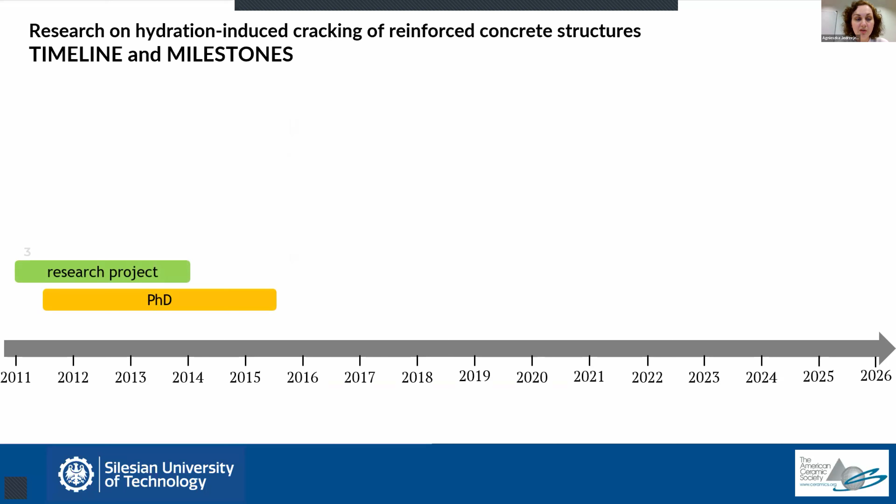My research work began already in 2011 within a research project that I was conducting in Poland together with my future PhD supervisor, Professor Barbara Klemczak. This is how I started my PhD, which was related mostly to numerical modeling of thermal and shrinkage stresses in externally restrained reinforced concrete structures.

At the end of this time, I had the pleasure of visiting École Normale Supérieure de Cachan. This is actually a place where I met with Alessandra, and under the supervision of Professor Farid Benboudjema, I was continuing my work related to numerical modeling of massive concrete structures.

In 2015, I successfully defended my PhD thesis, and the same year I joined a very interesting initiative, the Cost Action TU1404, which was related to service life design of massive concrete structures, or generally structures based on cement-based materials. Within this action, I was responsible for a work group related to modeling of massive concrete structures.

At the same time, I also joined RILEM, and actively participated in the first of many technical committees within RILEM. The first one, 254, was related to thermal cracking of massive concrete structures. Among many outcomes of this technical committee, we produced a state-of-the-art report, which is, I would say, currently one of the most up-to-date books about the problem of thermal cracking of massive concrete structures.

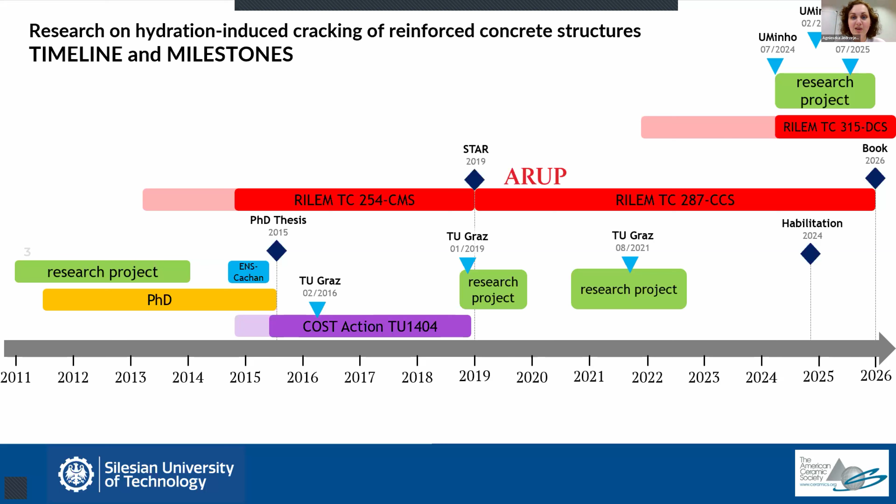I am also currently realizing an interesting research project, which is related to the application of ontologies, so knowledge-driven approaches to concrete design, in cooperation with the University of Minho in Portugal, which is also related to multiple visits. So currently I am actually not in Poland, but in Portugal realizing this project.

Regarding today's lecture, the outline would be as follows. I will start with explaining the problem, the phenomenon of restraint-induced cracking in general, and then I will focus on the cracking which happens in externally restrained elements such as walls, which is my main research focus.

Then I will move to the design methods that are being used around the world, with a special focus on the European approach, but also in comparison to the approach used in the United States. I will make some comments about the disadvantages or limitations of these methods, and then move forward with recommendations for how to better handle the design process to obtain more accurate results. I will finish this lecture with some key takeaway conclusions.

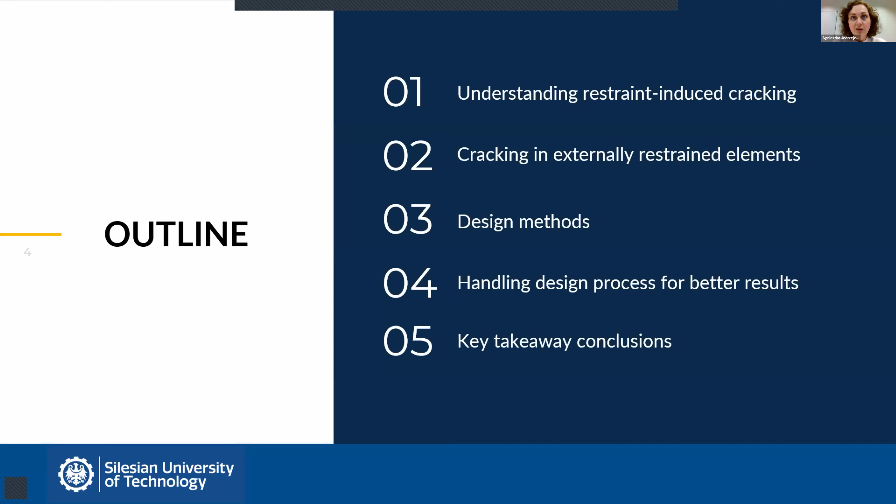So let me begin with what I promised you at the very beginning. Let me start with explaining the problem of restraint-induced cracking. When we talk about cracking, engineers usually think about cracking that happens in hardened concrete during the service life of a structure, when cracks are caused by the service loads predicted during design. Of course we expect this cracking, and even at the design stage we predict that it will happen, so our focus is on limiting the width of the crack.

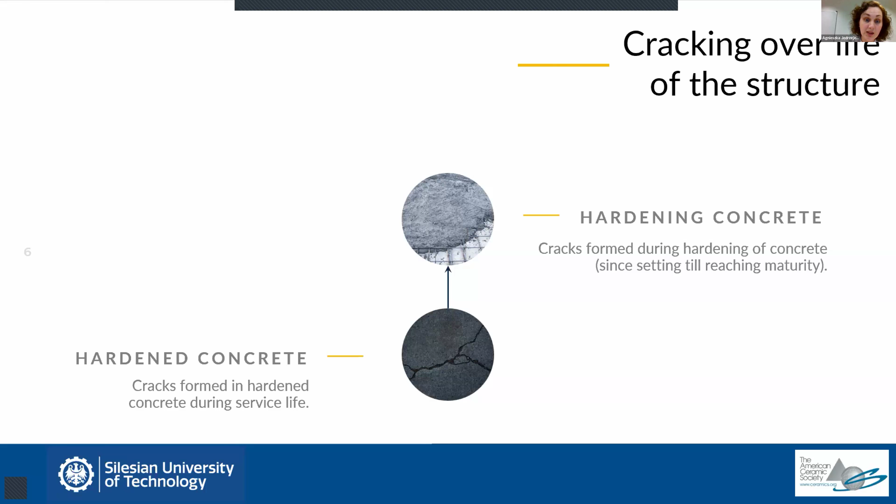However, what most engineers don't realize or neglect is that cracks can appear much earlier during the life of the structure. One of the most important problems related to cracking are cracks which occur during the hardening phase in concrete, between setting and maturity, as well as cracks that can happen already in fresh concrete during setting. While the first type, cracks in fresh concrete, usually don't have much structural meaning, the cracks which happen during hardening are already very dangerous, because if they appear, and they usually do, it means that when the structure is put into operation, it is not in a zero stress state as is usually assumed, but it is already in a way pre-stressed and pre-damaged.

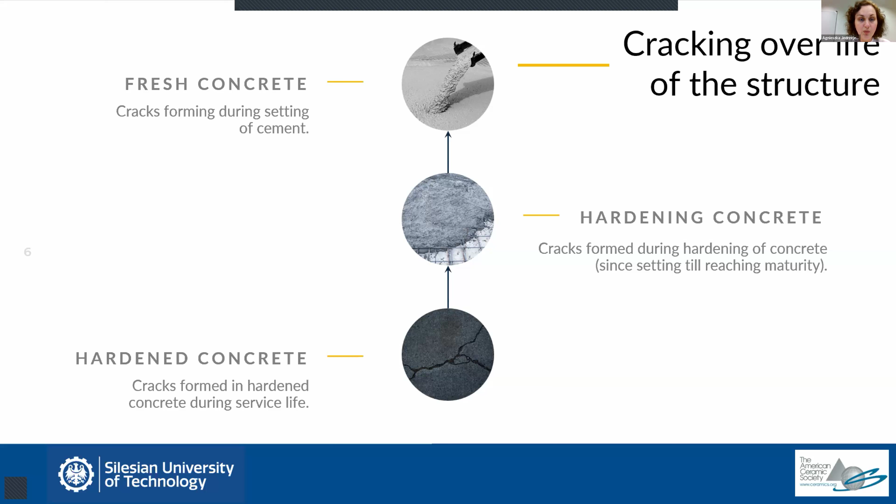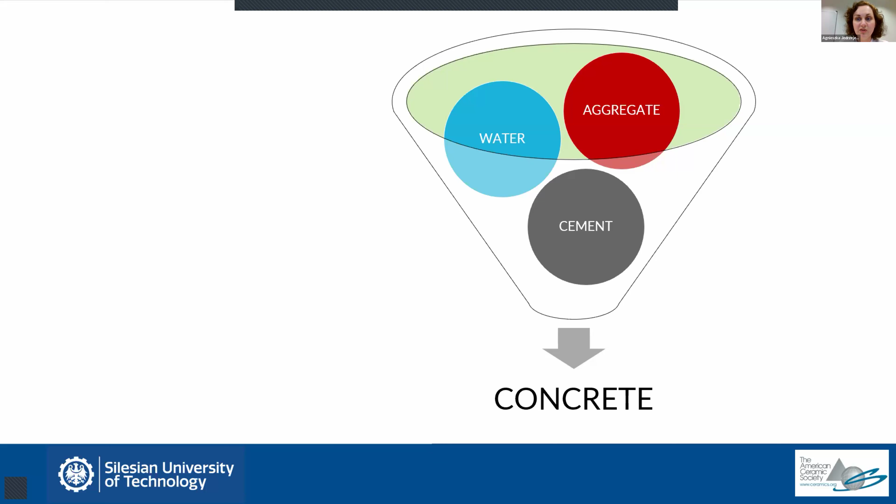And what is the reason for this crack? Where does the problem lie? It lies inherently in the nature of concrete, because as we all know, concrete is a composite material produced from a mixture of water, aggregate, and cement. When we produce concrete, we want to produce an artificial stone in which the components of the aggregate are submerged in a cement matrix, which is produced due to hydration of cement with water. This is how we obtain this artificial stone. Because of this hydration of cement and water and production of this cement matrix, we obtain a desirable stiffness and strength - that is actually our goal. But at the same time, we usually forget that this process has some negative effects.

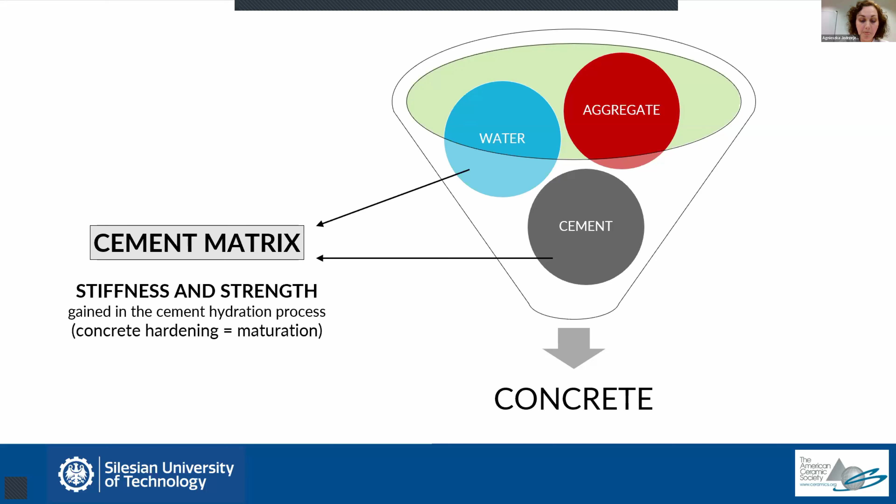Due to hydration, there are some phenomena that happen in concrete related to temperature and shrinkage. First of all, we must remember that cement hydration is a highly exothermic process, meaning that large amounts of heat are produced, leading to an increase of temperature in the element. Moreover, hydration of cement, the bonding of cement with water, causes the so-called autogenous shrinkage, meaning that the volume of the product, the cement matrix, is a little smaller than the total amount of water and cement - another reason why we have a decrease in volume. Finally, some of the water which we add because of workability requirements is not needed for hydration, and this water is removed due to drying shrinkage. So these three processes cause volume changes, and the problem becomes even more complex because the importance of this phenomena depends on the so-called massivity of the element.

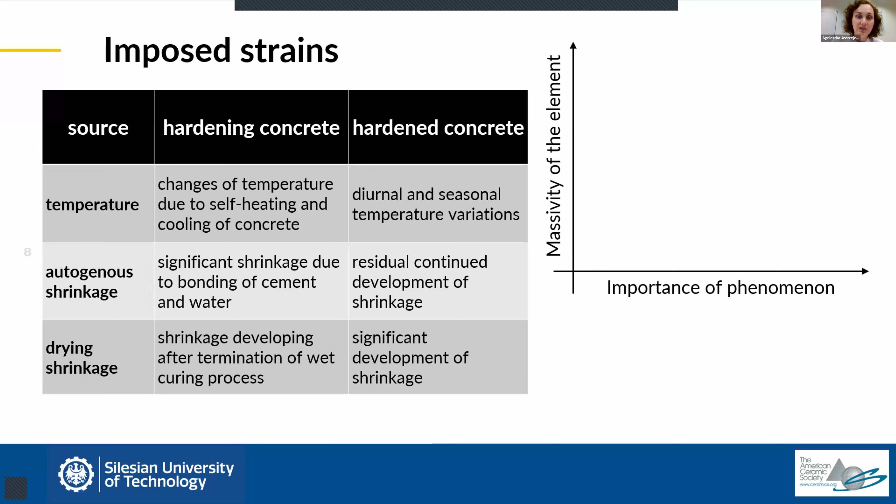I think each of us, if we hear the name massivity, can pretty naturally understand what massivity is. We usually understand it as a large volume of something. We can imagine that as the massivity of the element increases, the influence of thermal strains, connected with the production of heat, also increases. The same goes with autogenous shrinkage, because even though this process is related mostly to the type and amount of cement, it is also a temperature dependent process. So if massivity increases and the amount of heat increases, then the effect of autogenous shrinkage is also augmented in some way. On the other hand, drying shrinkage is a process that is inversely dependent on massivity, because drying shrinkage is mostly a superficial or surface related effect. So if we have a massive element, the drying shrinkage effects will only appear mostly on the surface, but will not influence the volume of the element that much.

We also need to remember that all of these processes not only occur at early ages, but also during the whole service life.

We can also experience some thermal effects during the service life, which are connected with seasonal or daily changes of temperature. But in this situation, since the effect from temperature is from the outside, it decreases with massivity.

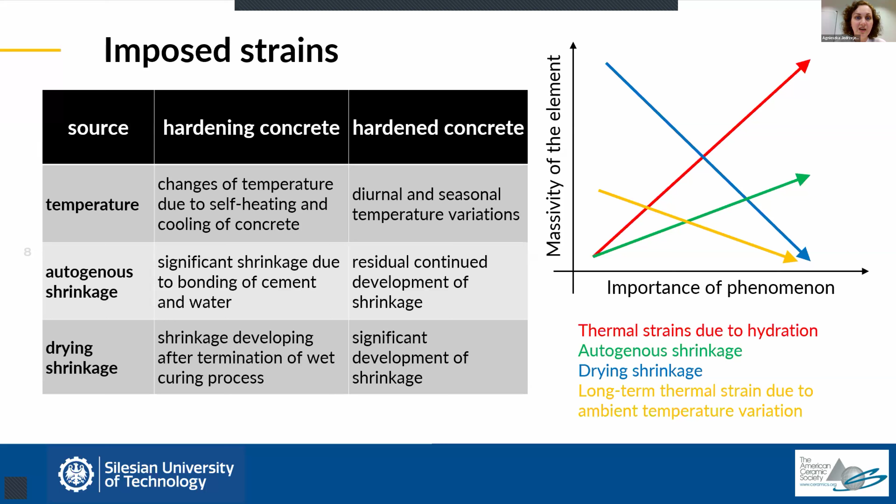And here comes a very nice and widely used definition of massive concrete that comes from the ACI guideline on mass concrete, which says that mass concrete is any volume of concrete whose dimensions are large enough that such a structure will require measures to be taken to cope with the generation of heat from hydration of cement and attendant volume changes, to minimize cracking.

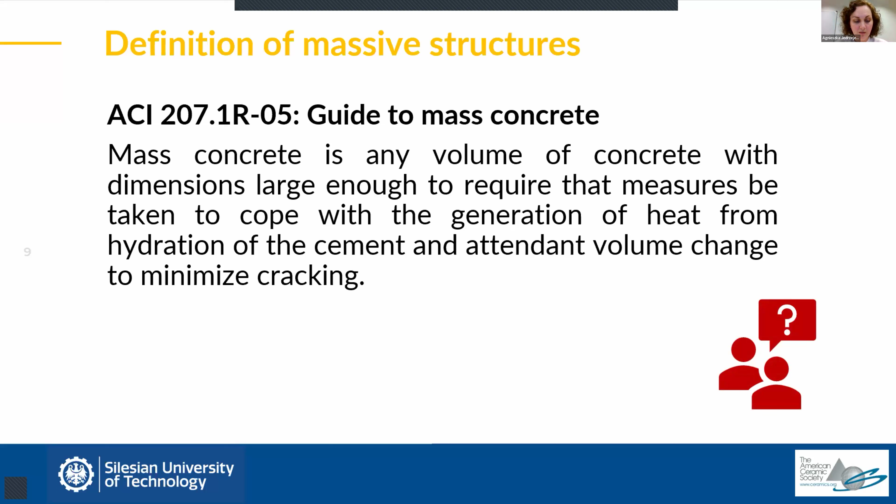On one hand, this definition is very understandable because we usually connect massivity with volume. But on the other hand, I believe, and a lot of people believe, that this measure is not very quantifiable. That's why we relate to other measures, and what comes at hand are geometrical criteria for massive structures.

This same guideline provides some measures for massivity, which relate the volume of concrete to the total area of exposed surfaces. One component, the volume, will tell us how much heat will be produced, and the other component, the area of exposed surfaces, will tell us how quickly this heat can dissipate from the element, which will directly affect the internal temperature.

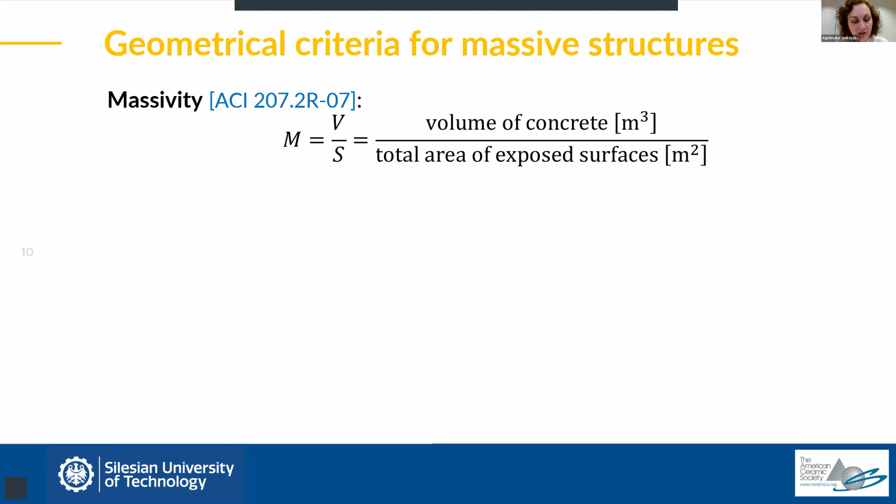This measure has been improved by De Schutter and Taerwe in a European approach, for more complex shapes. Of course, if we imagine a prism, then understanding this ACI definition is very straightforward, but for more complex structures, Schutter proposed another measure which also uses a correction factor representing the shortest path for the heat to pass from the core to the surface.

A similar measure was proposed by Flaga, a Polish researcher, which is very similar to the massivity definition from ACI. The only difference is the inverse approach, even though if we go into detail into understanding these two measures, we will see that the definition of the exposed surfaces in these two approaches is a little bit different.

Also, what is important is that the proposal of Flaga is the only proposal which is actually quantifiable, because not only does it allow us to calculate the massivity, but it also allows us to classify structures according to massivity. So it can allow engineers to do some preliminary analysis to define if a structure is susceptible to thermal cracking or not.

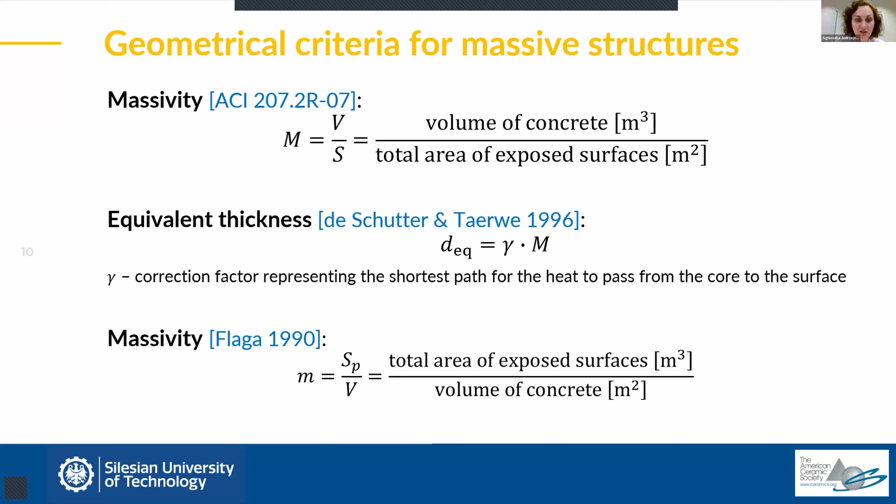That is why a working group within a RILEM Technical Committee, in which I was involved, proposed a corrected massivity, which uses the geometrical massivity but proposes some correction factors to account for other important factors that influence massivity. As you can see in this formula, we have three correction factors related to the following phenomena.

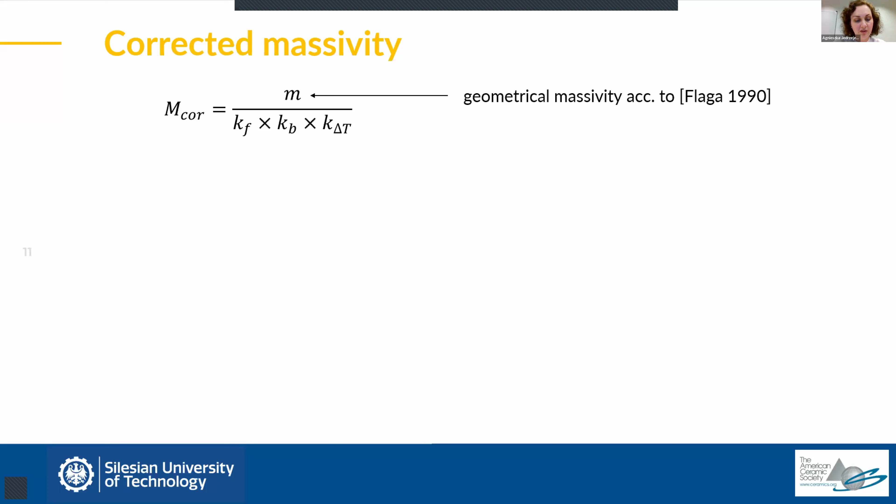First of all, this is a relative heat correction factor, which defines the type of cement that we use. For Portland cement, the value of this correction factor would be 1, but for mixed cement, so cements in which we use less caloric binders, this value would be lower than 1.

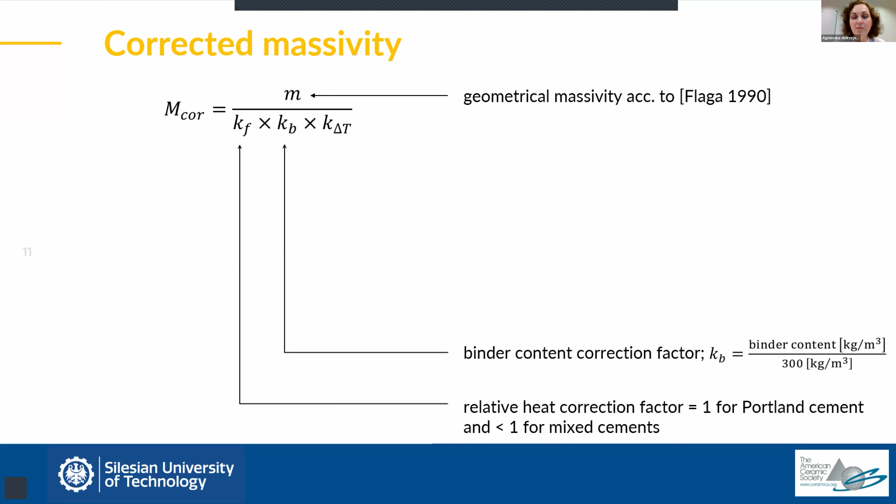Then another correction factor relates to the amount of cement, because using different types of cements, we also change the amount of cement from the typical one that used to be applied in typical concretes several years ago.

And finally, we propose another correction factor which takes into account technological conditions, so the initial temperature of concrete and ambient temperature. This way, the corrected massivity can reflect the technological measures that can be taken to prevent thermal cracking.

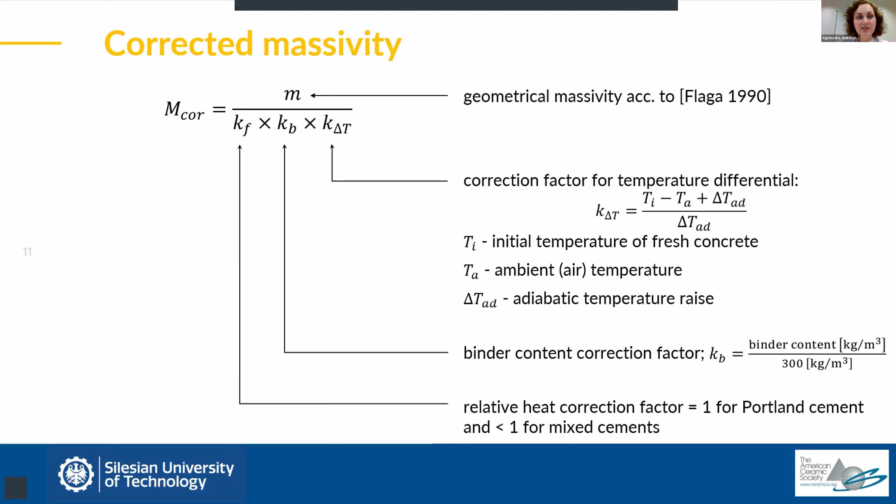So eventually, how do we interpret this corrected massivity? We interpret it in such a way that if the value of this massivity factor is higher, it means that the structure is less prone to thermal cracking.

And we have defined that if this massivity is below 2, then such a structure can be classified as massive, which means it's susceptible to thermal cracking. And if it is above 2 and between 2 and roughly 15, then such a structure is medium thick, which means thermal cracking potential is non-negligible.

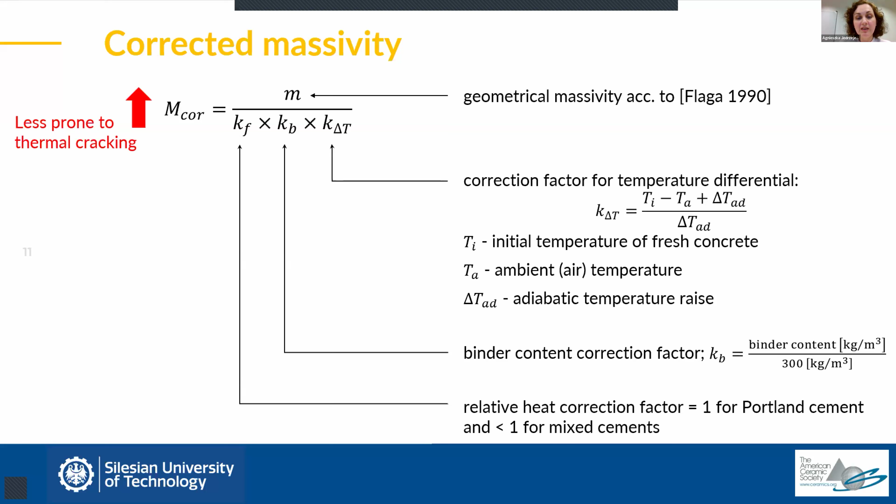Only above the value of 15 do we say that the structure is a thin-walled structure, and thermal cracking can be neglected, meaning we have conditions close to isothermal. If you're interested in more on this research, I refer you to a paper in which our team has presented this measure.

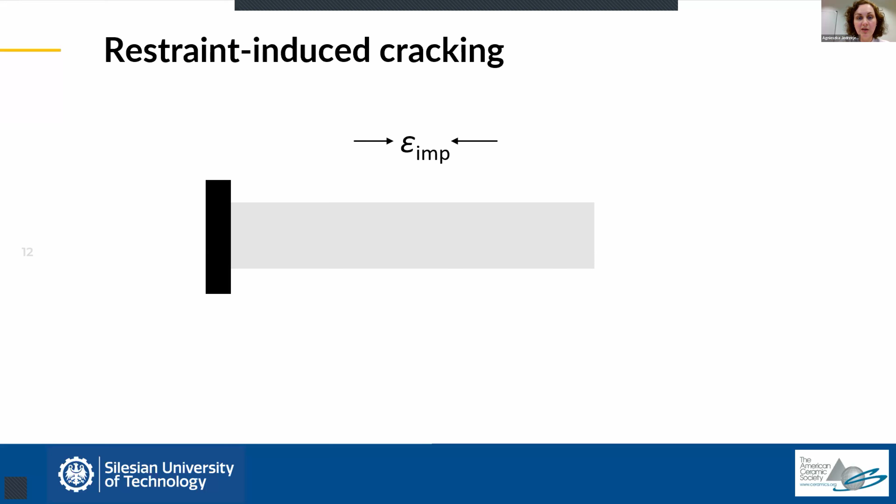So now that we've proposed a measure to say a structure is susceptible to thermal cracking, how do we reflect it in a structure? This is how we move to the problem of restraint-induced cracking. Let me explain with a simple example of a tie element, which is usually used to describe this type of phenomena. If this element was not restrained and was subjected to imposed deformation, such as thermal strain or shrinkage strain of a negative value, then it will just decrease in volume. In such a linear element, we can simplify this into a shortening, and this shortening will cause no stresses.

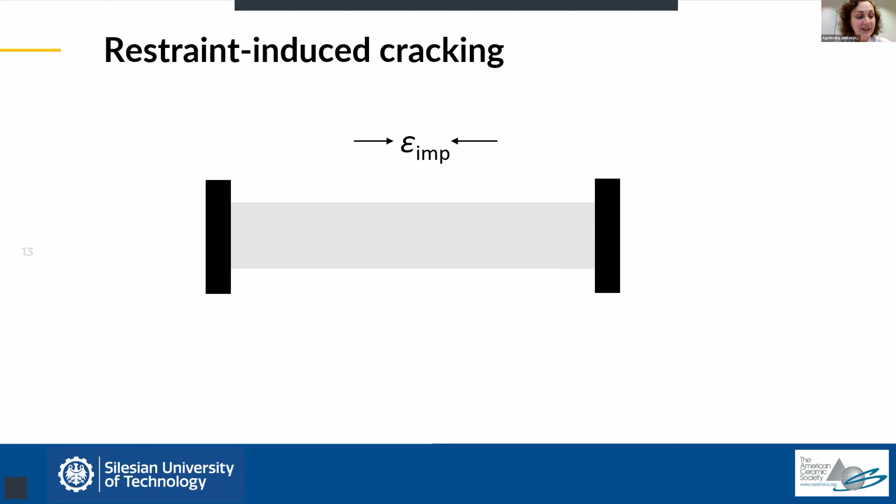The problem arises if such an element is restrained, because if it is restrained and subjected to negative imposed deformation, such as shrinkage, the element tries to shrink but cannot because of the restraint. This means a force will be produced in the element, and since this imposed deformation is negative, we expect this force to be tensile. The value of expected stress within the element can be calculated from this simple formula: force over cross section. If the value of this force reaches the so-called cracking force, meaning the stress reaches the tensile capacity of the element, then we expect a crack to occur.

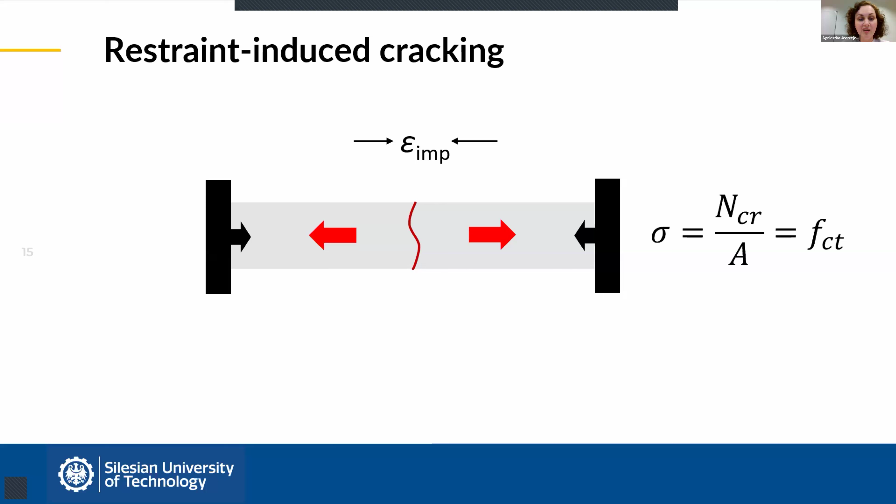In the serviceability limit state of cracking design of structures, we of course allow such a crack to happen, but we have to limit its width. The width of the crack, apart from the value of the strain, will also depend on the applied reinforcement—its location, size, and amount.

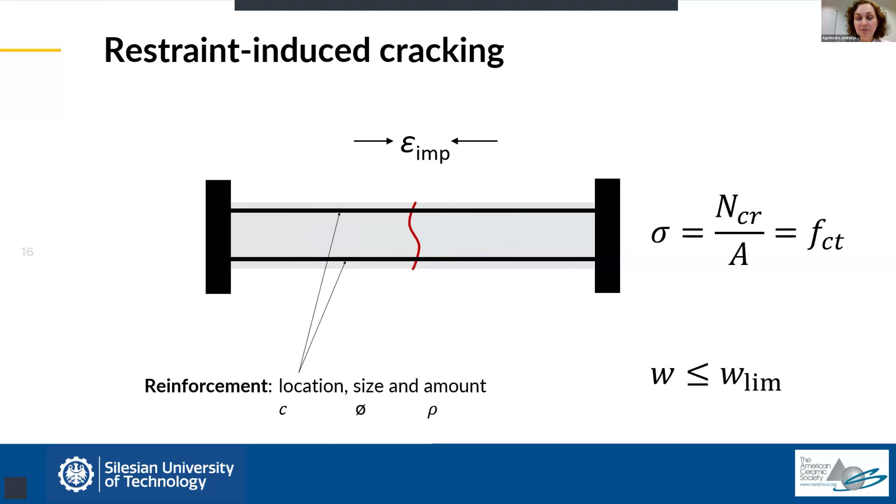Now, how do we correlate this to actual structures? I want to focus on actual externally restrained structures, especially those types of elements important in my research: the walls. We can find in reality many examples of structures with significant massivity, of a value that says thermal cracking is non-negligible, meaning imposed strains will be formed in such elements during service life, but which exhibit some form of external restraint. This encompasses elements such as bridge abutments, tank walls, tunnel walls, or nuclear containment walls.

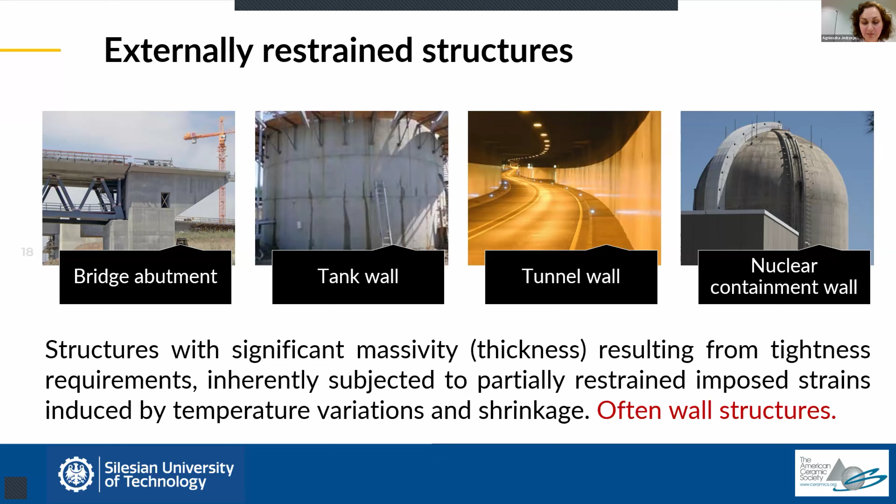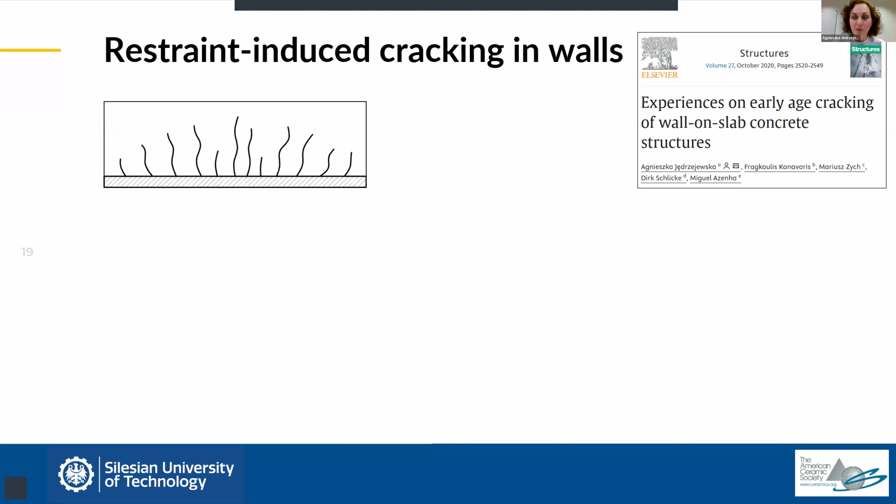For that, I want to show you the results of numerical simulations of a wall. Here we have a scheme of a wall, and we will be analyzing a quarter of it. In the next slide, you'll see the interior of such a wall, and I will show how the temperature and corresponding stresses develop.

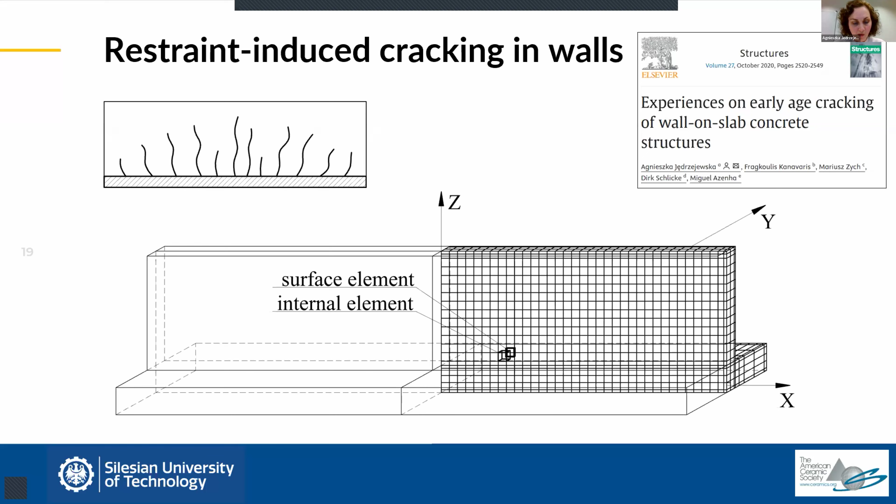In the beginning, we observe compressive stresses in the wall. Then as we pass the maximum hardening temperature, these compressive stresses diminish, cross the zero value, and tensile stresses start to develop. In many such elements, these tensile stresses reach significant values, reaching the tensile strength of the element. As I explained at the beginning of this lecture, if the tensile strength is reached, it means a crack is formed.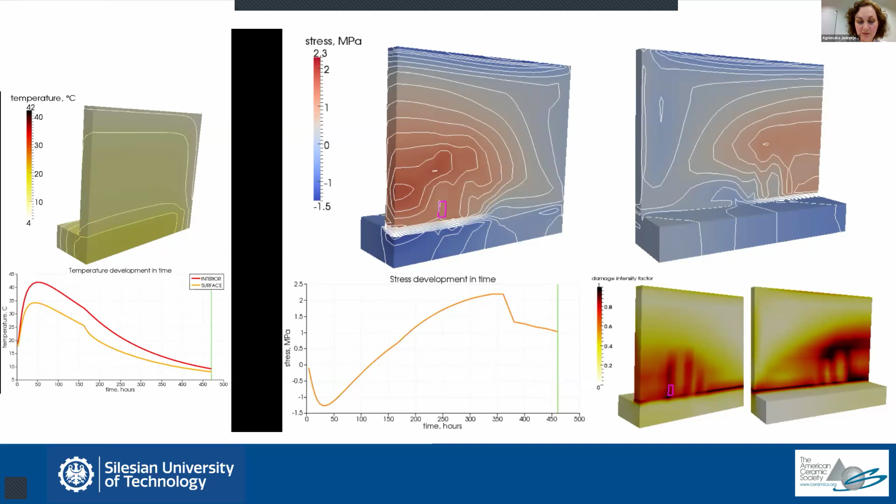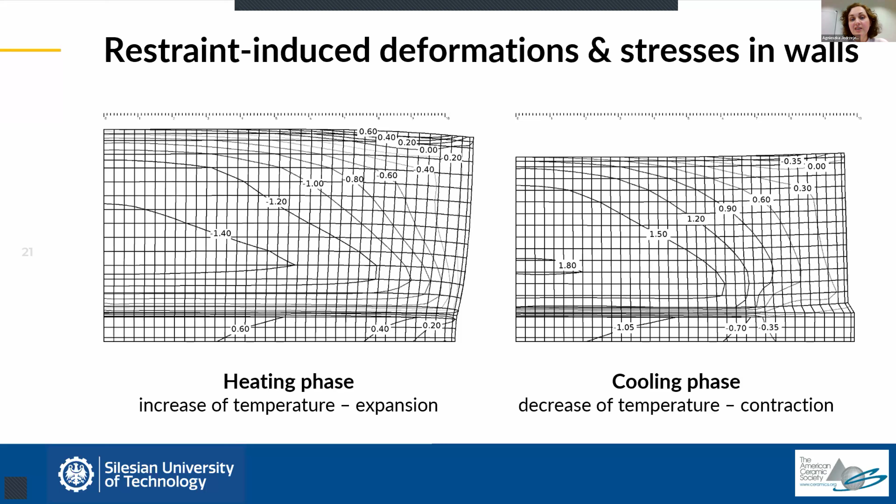Just to summarize, the situation looks like that. We can divide the behavior of such a wall into two phases. We have a heating phase, increase of temperature, which results in an increase in volume, especially increase in length, which means the wall tries to elongate. And in the cooling phase, when the temperature decreases, the wall starts to shorten, or it would like to shorten. But since it is restrained, this deformation is partially limited. That is why the stresses occur in the wall.

So obviously, as I have shown, the maps of these stresses are pretty complex. These stresses are variable within the volume of the wall. But what we can observe is that some simplifications can be made in a sense that when we look at the map of stresses along the length of the wall, they coincide with principal tensile stresses which are observed in the wall.

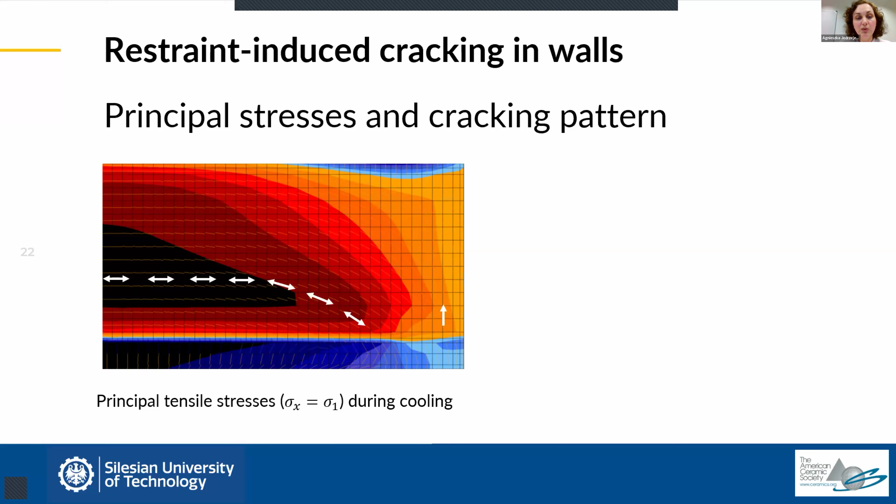So if we follow the trajectories of tensile stresses in the wall, we see that in the central part of the wall, the tensile stresses are practically horizontal, and the deviation starts to appear as we get closer to the end of the wall, which results from the warping effect of this end of the wall.

And as a result, the cracks look like that. So they are vertical in the central part of the wall. Again, we are looking at a quarter of the wall, actually like a half length of the wall. So what we see here is that the crack in the center of the wall is vertical and reaches relatively the biggest height. And then the cracks become smaller and they turn to tilt towards the end of the wall.

So how we also understand the principal tensile stresses is that the cracks will form in the direction perpendicular to these tensile stresses, and they will open in the direction which complies with the trajectory of the tensile stresses. So by this simple stress analysis, we have explained why we observe such shapes of cracks.

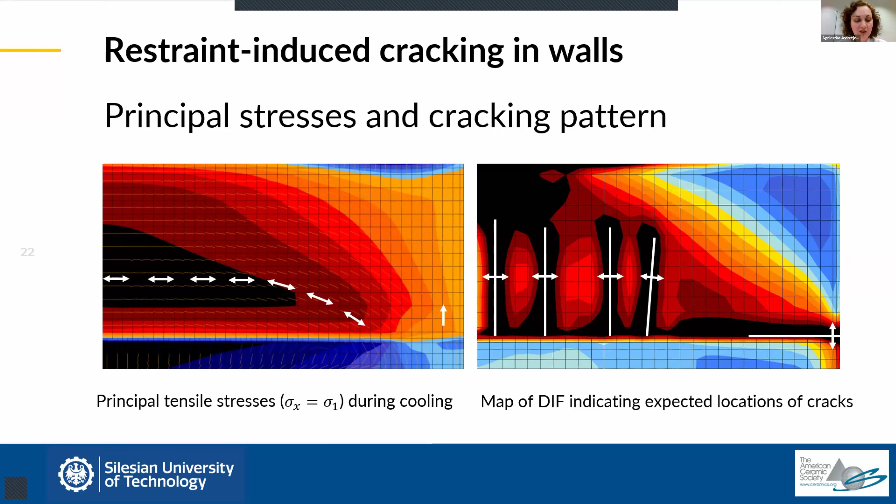And now how we apply it in the modeling. So we are coming back to this simple tie model. Again, here you see a wall with a typical cracking image. And as we have explained, the height of the cracks will depend on the effect of base restraint. And this is usually depicted with the use of the so-called degree of restraint.

And I think it also can be explained rather naturally. So the biggest restraint, so the force, let's say, with which this wall is held, it is biggest at the joint, and then it decreases towards the free top of the wall.

But anyway, as I have shown in the slide before, we may say that in the central part of this wall, the tensile stresses, so when we have this imposed deformation that is negative, which means it's trying to shrink the wall, as a result, there is a tensile force that develops. So even though this tensile force is eccentric, we can say that in the central part, it produces pure tension. And since the design for cracking is focused on the maximum crack width, and the maximum crack width will appear in the center, we can simplify such a wall into a tie.

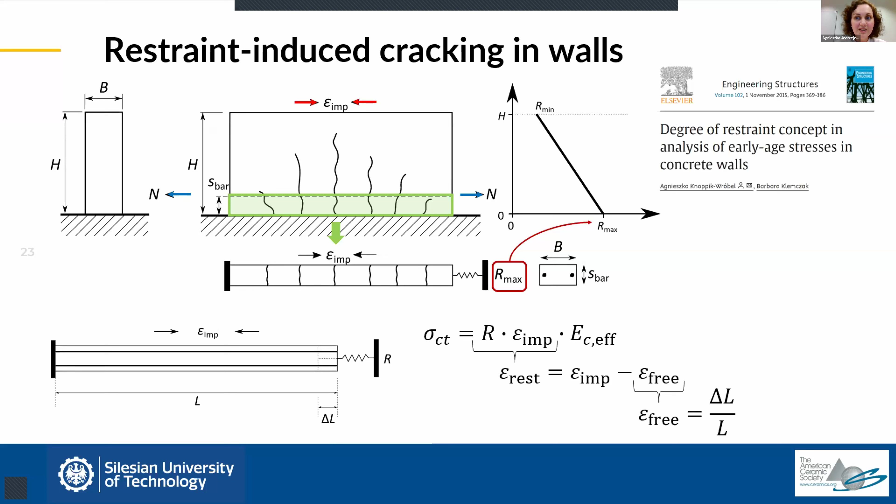And why is that possible? Because for that purpose, we use the so-called simplified viscoelastic material model. And what are the basic assumptions of this model? So once again, let's come back to this diagram, which presents development of temperature in the element.

Just to remind you, we have a phase of rapid temperature increase when the hydration heat prevails, and then subsequent cooling when we deplete the hydration heat and the wall starts to cool to the ambient temperature. This cooling phase is responsible for production of tensile stresses, as I showed in this more complex analysis.

So in our simplified approach, we only consider the thermal strain caused by this temperature decrease. If we add to this the effect of shrinkage, like drying shrinkage and autogenous shrinkage, this is how we obtain the total imposed deformation. Only the restrained part of this deformation is responsible for producing stress. So for the calculation of stress, we only take R times epsilon, which means the degree of restraint times total imposed deformation.

And we use a linearization technique, so we can say that stress depends directly on strain, and the proportionality constant, according to Hooke's law, is the modulus of elasticity. But we don't use the full modulus of elasticity, we use the so-called effective modulus of elasticity, which represents the effect of creep. This modulus is much smaller than the actual modulus of elasticity. As a result, the actual stress will be smaller than in a typical linear analysis, but this is how it is - the effect of creep reduces the stress.

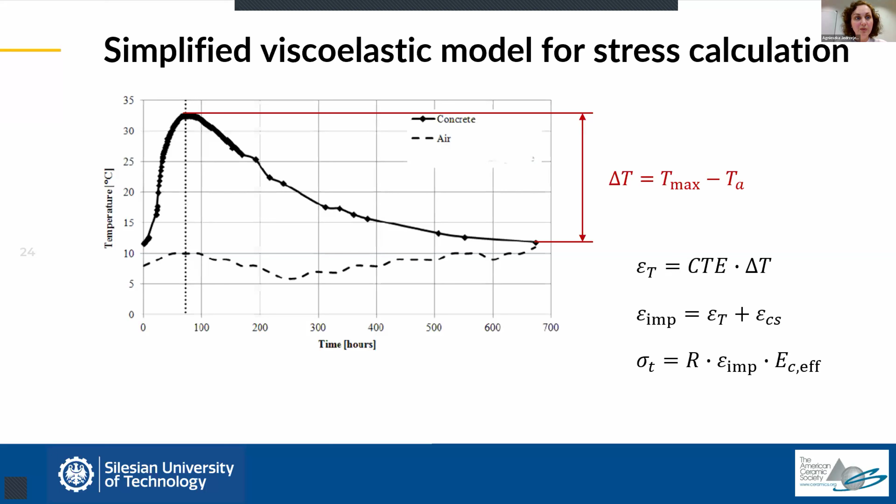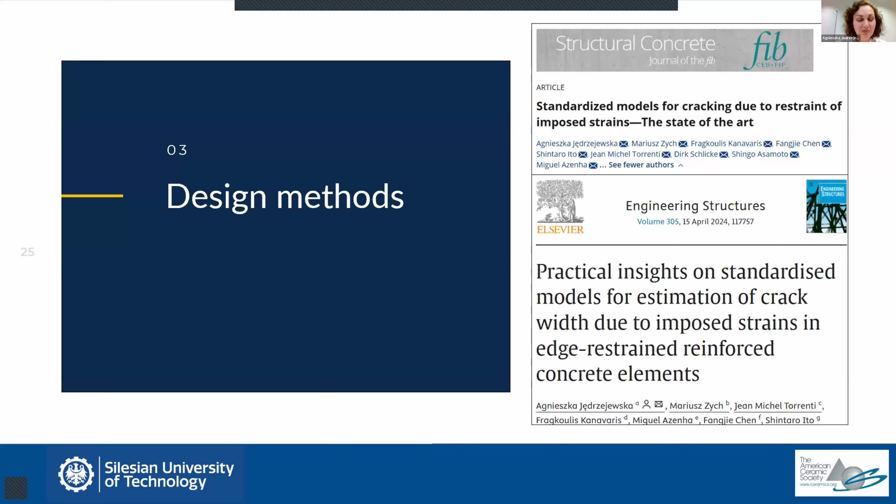Now let me show you briefly how design methods approach this. What I will show in the next slides, you can read more about in the papers that our technical committee produced in cooperation with engineers from ARUP. I would like to present the methods that are used worldwide. I will try to be brief and not go too deep. But anyway, I will start with the European approach - the approach proposed in Eurocodes, the family of standards commonly used in Europe, but also outside of Europe on other continents.

According to Eurocode 2, the Eurocode dedicated to concrete structures, the width of the crack in general, not only the crack caused by imposed deformations, but the crack in general, can be calculated as a product of crack spacing and the difference in mean strains between steel and concrete. Nonetheless, in case of restrained cracking, as I showed you, we don't have full restraint of the element, which means the width of the crack will depend not only on the applied reinforcement, but it will depend on the magnitude of restrained deformation.

That is why the standard proposes to calculate the mean strain difference as being dependent on this restrained part of strain. This way we take into account the local effect of crack on the element.

However, this value is reduced by the so-called extensibility of concrete, which means the ability of concrete to extend between cracks. So bluntly speaking, we say that cracks happen, but then concrete can regain some of its volume between cracks as a form of relief of stresses. This is an important factor to account for.

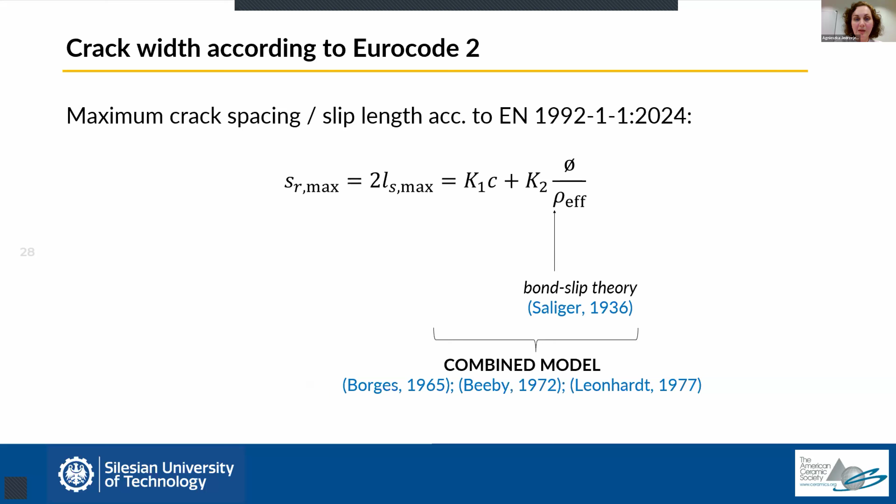However, as far as the crack spacing is concerned, Eurocode proposes to use the same approach as it does for direct loading. For that purpose, we use the so-called combined model, which is composed of two components: one which results from bond slip theory, and which relates the slip length to the amount and location of reinforcement, and the other one which directly relates it to concrete cover.

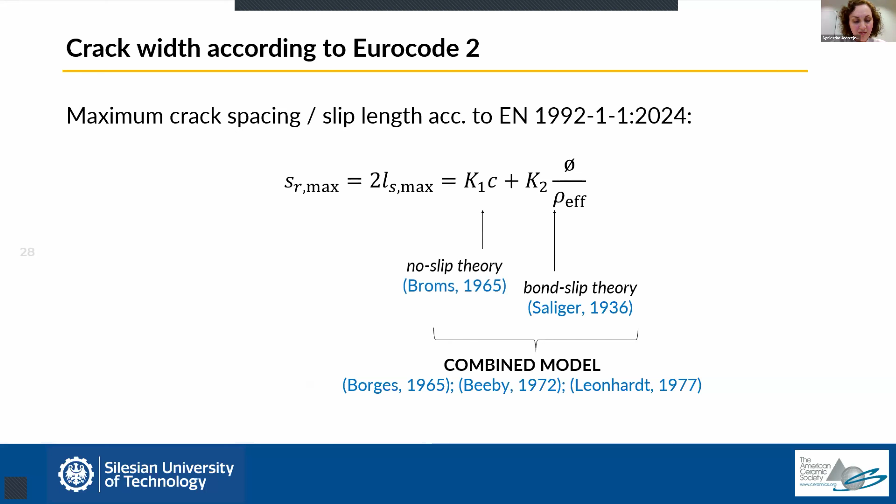In Europe, you can find a lot of variations of this approach, but all of them follow the same formula. There are two main differences. First is whether the concrete cover is taken explicitly into account, because in most approaches, the concrete cover is taken into account in determination of the effective degree of reinforcement. And the difference lies in the values of constants in this approach. So this is basically how we do it in Europe.

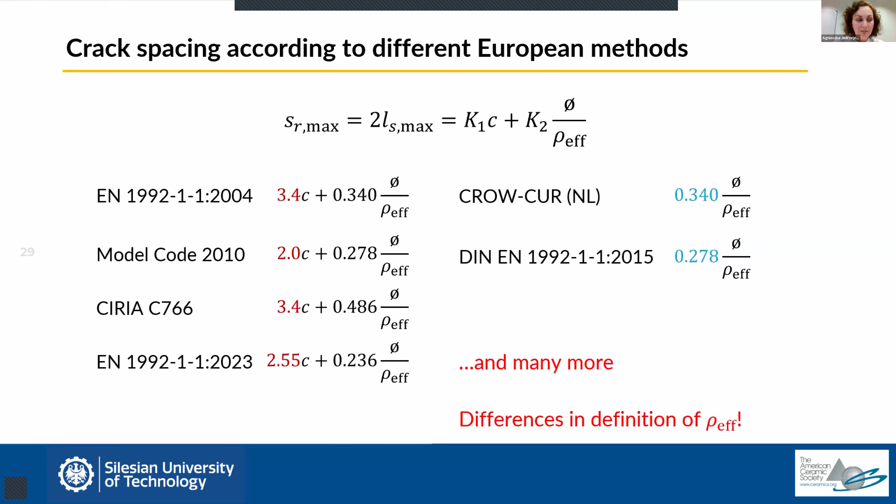However, there are other approaches used worldwide, which can be classified into groups depending on the location. The second group I called Asian Pacific methodology, because these concepts are developed mostly in Australia and in Japan, and they are applied in various countries of the Asian Pacific region. The first approach was proposed by the Japanese organization, Japan Concrete Institute, and this approach is based on FEM-based calculations and statistical analysis. In this approach, it is first required to determine the so-called cracking index.

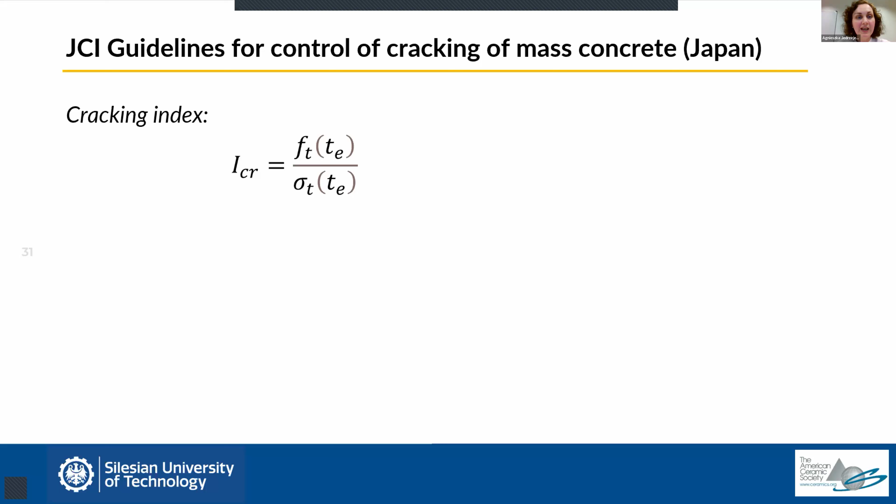This relates tensile strength and tensile stress, but the standard explicitly recommends that this is determined using complex three-dimensional FEM-based simulations. However, the crack width is then calculated using a fully empirical formula, which uses the cracking index, determined this way. This formula has been developed based on a database of results, which were calculated using FEM-based simulations.

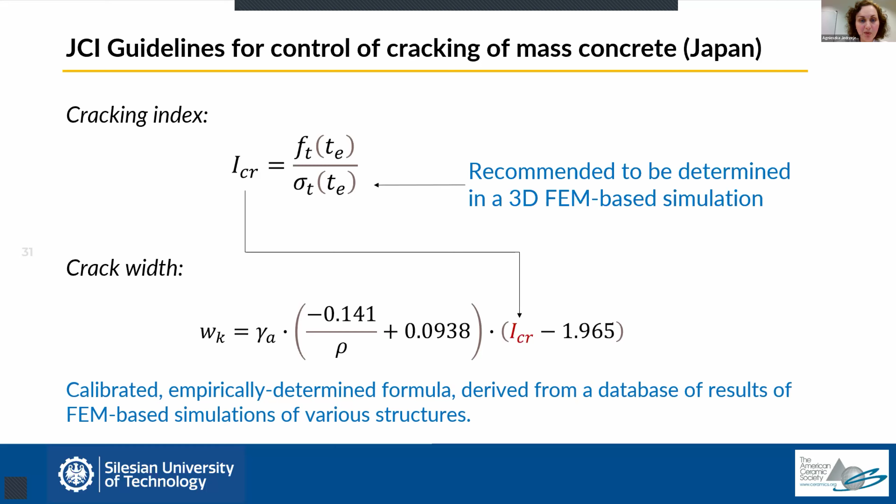An alternative approach is used both in Japan and in Australia, and they are based on a similar approach, even though they were developed somehow independently.

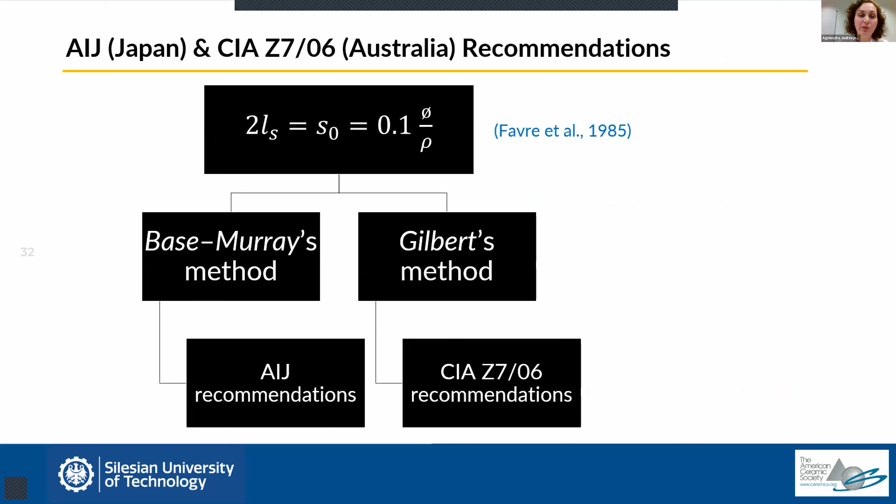What is important here, without going into too much detail, is that in contrast to, for example, the European approach, this approach doesn't assume that we have a stabilized cracking pattern.

Instead, when we know the value of the expected imposed deformation, we calculate the expected spacing of the cracks and compare it with the expected stabilized cracking. This way we know which state we are in, and we calculate the expected crack width accordingly, because it is important to remember that the slip length changes with the value of slip.

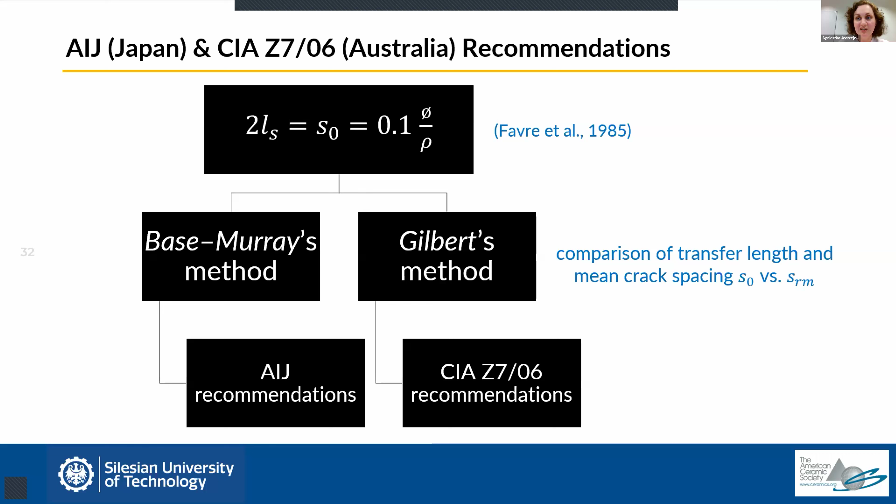This means the magnitude of the load, and these methods take this into consideration. Nevertheless, we can see similarities between these equations and the European approach. The stresses and the resultant crack width also depend on this restrained part of strain.

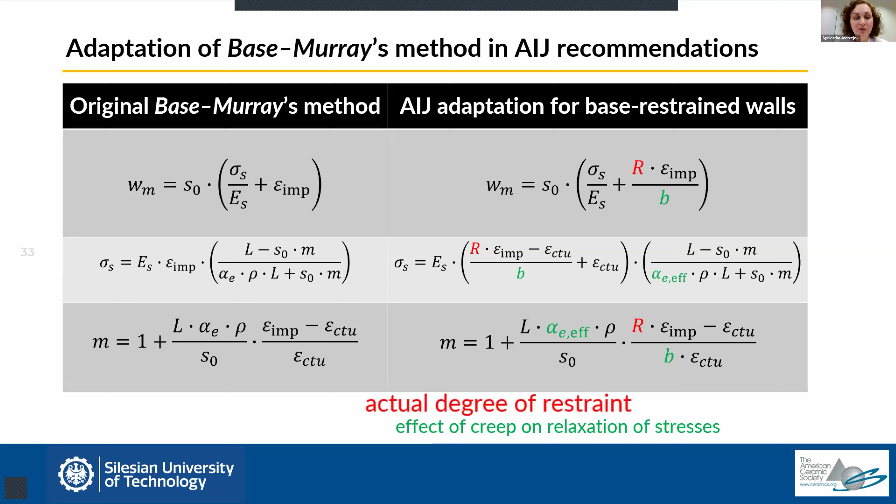On the left, you see the original method, which was developed for a fully fixed tie. On the right, you can see an adaptation prepared for a partially restrained element such as walls. The difference lies in the fact that we take into account the actual degree of restraint, and also that we account for the effect of creep, which is of great importance at the hardening stage when the value of creep is really high.

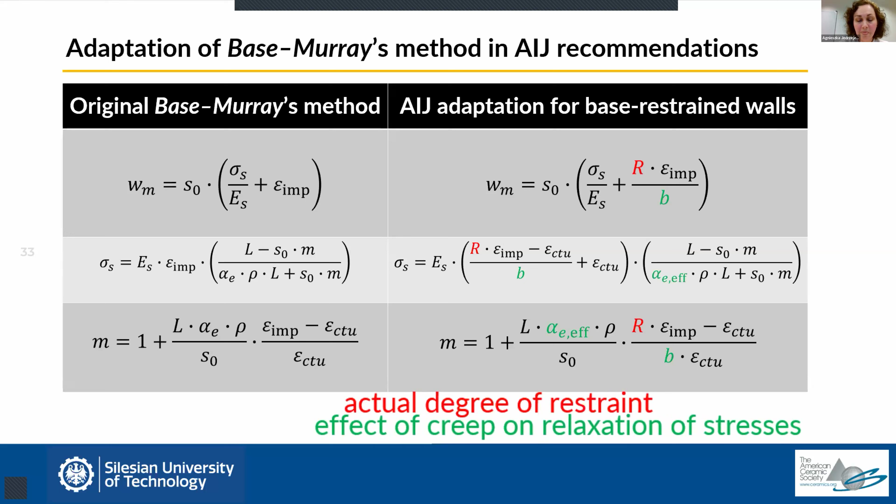Finally, we have an American approach, which was implemented in the previous version of the ACI report 207. Unfortunately, I saw that in the current version it was removed. Nonetheless, I really wanted to investigate this approach.

Here the philosophy is a little bit similar to the European one. To calculate the crack width, the same formula is used as for direct tension or direct bending. The difference lies only in some parameters, some constants, in the sense that for tension we expect greater widths of cracks, so higher values of parameters are taken into account.

The difference between the European and American approaches is that in the European approach, first we calculate the crack spacing and then the resulting crack width. In the American approach, it's the other way around: first we calculate the crack width, and from that we calculate the crack spacing.

If you look at this lecture again, you can make a direct comparison between this approach and the European approach, and you'll see that the formula is exactly the same. So the correlation between crack width and crack spacing is exactly the same as in the Eurocode approach. The only difference is in the factor which converts mean crack width to maximum crack width, because in the American approach this is 1.5 and in the European approach it's 1.7.

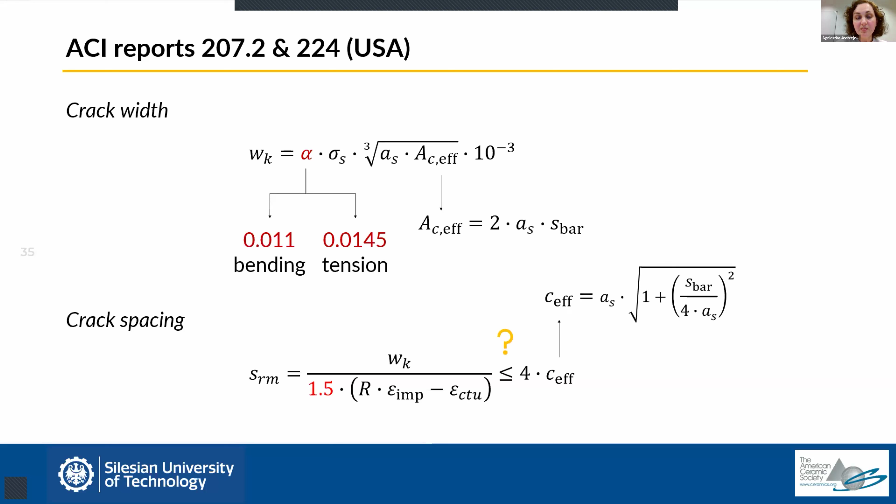Another difference is that the American approach allows us to check which cracking stage we are in with our loads, because we compare the crack spacing calculated this way with the crack spacing expected at the stabilized crack stage.

Another very interesting aspect of the approach proposed in the ACI report is how the required amount of reinforcement is calculated, which really allows for high optimization levels.

I told you at the beginning of this lecture that the degree of restraint changes along the height of the wall. Normally in all of the previous approaches, we took the maximum value of the degree of restraint for calculations, calculated the expected crack width, and used this to calculate the required reinforcement. But if we do it this way and apply uniform reinforcement, it means that the higher we get in the wall, the more over-calculation we achieve.

In the American approach, it's explicitly stated that the wall should be divided into parts called lifts, and we can differentiate the amount of reinforcement needed at each height. We are producing not just one model, but multiple models of partially restrained ties, and in each of these ties we calculate the crack spacing, which depends on the degree of restraint present at that level of the wall.

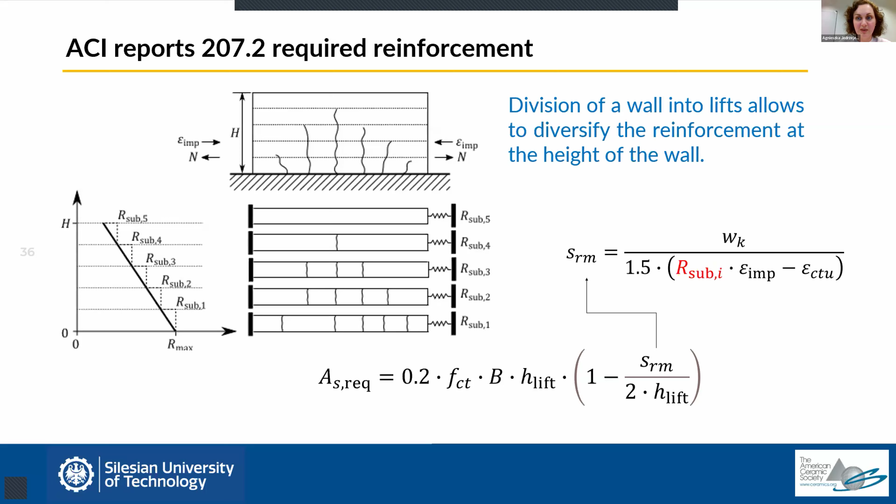So this can really give us a lot of savings when calculating reinforcement. In my research, I investigated all of these methods and compared them. I was interested in seeing how they work, and I checked many different structures, trying to evaluate the predictive capacity of these methods, and I observed a lot of discrepancies.

In this slide, I decided to show you just one theoretical example of a typical wall, which I wouldn't even call a massive wall.

And you can see that the differences of calculations using different methods are really huge. So on the left, you can see the expected crack width, which is calculated using different methods. And on the right, you see the required amount of reinforcement that is needed to limit the crack width. So as I said, the differences are really huge.

And with my team within RILEM, we have calculated many walls. And what we have observed is that even though these differences are really huge for typical walls, if we go for untypical walls, so the walls whose characteristics are deviating more and more from typical assumptions that we meet in the standards, these differences become even bigger.

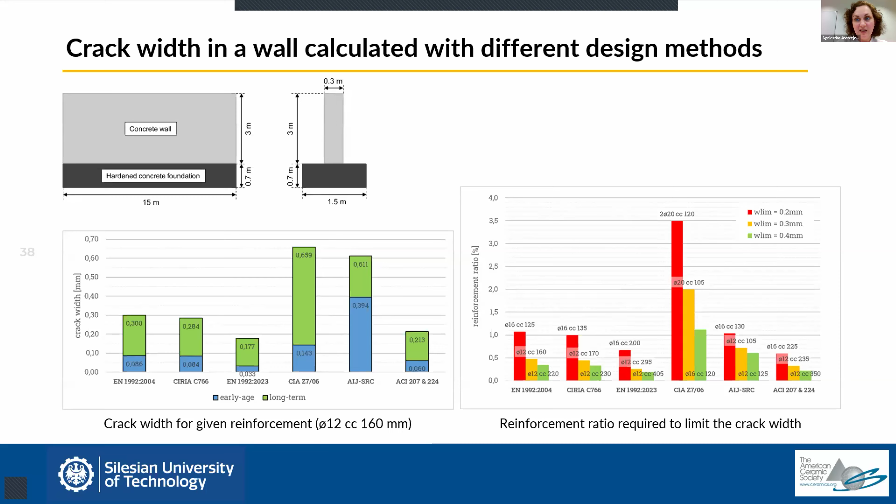And in this last part of this lecture, I want to make some discussion, give some proposals of what we need to take into account to obtain results which are closer to reality. So how we should adapt, how we should wisely use these methods to obtain reasonable results.

So first of all, I hope I was able to show you that since these structures are a little bit non-typical, it is important to remember that the width of the crack will depend on the actual level of the load. Because in such structures, we are never reaching the stabilized crack spacing, because only in the stabilized crack spacing will the amount or the width of the crack depend on the reinforcement. No, in this situation, the width of the crack will actually depend on the level of the load.

So in order to predict the crack width properly, we need to be able to predict the value of this load, which means first of all, the magnitude of the imposed strain. And as I said at the beginning of the lecture, this imposed strain is composed of three components: one which is related to temperature, and the other two which are related to concrete shrinkage, the autogenous shrinkage and drying shrinkage.

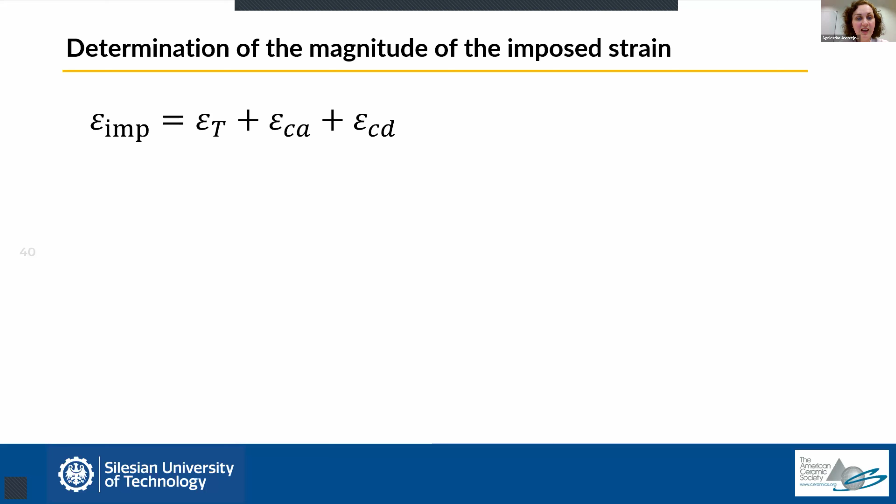So for these latter two, we have multiple methods that allow us to predict it decently, I would say. Among them, I can enumerate different versions of Eurocode, but determination of thermal strain is much more complicated. So there are some proposals of how to calculate the thermal strain, so the temperature changes in a hardening structure. And we have some European approaches, but also the ACI committee developed a really nice, really interesting method. However,

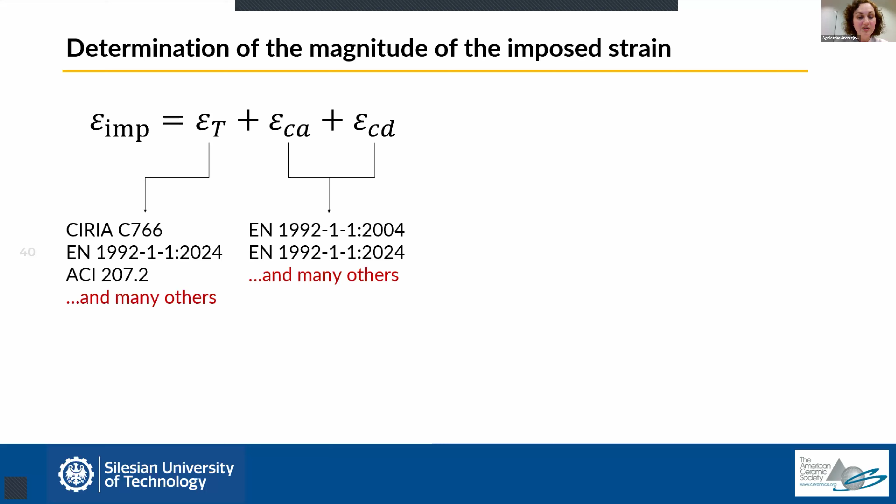I'm pretty confident to say that, especially regarding thermal strains, these methods are not really precise, and I support the approach of the Japanese from JCI, who say that currently, also given the abilities of FEM-based methods, it is better to determine thermal and moisture fields using three-dimensional models and FEM-based methods to calculate it.

And I don't want to go deep into that because my time here is finishing, but if someone is interested, of course, we can have a chat on this, or I refer you to two papers that I have co-authored, which delve into proper modeling of thermal and moisture fields and resulting stresses in mass concrete structures.

The second aspect, which is really important in determination of the load, is of course the degree of restraint, because it's not only important to assess the magnitude of imposed deformation, but also which part of this deformation will actually produce stress. And for that, we need to be able to determine the degree of restraint.

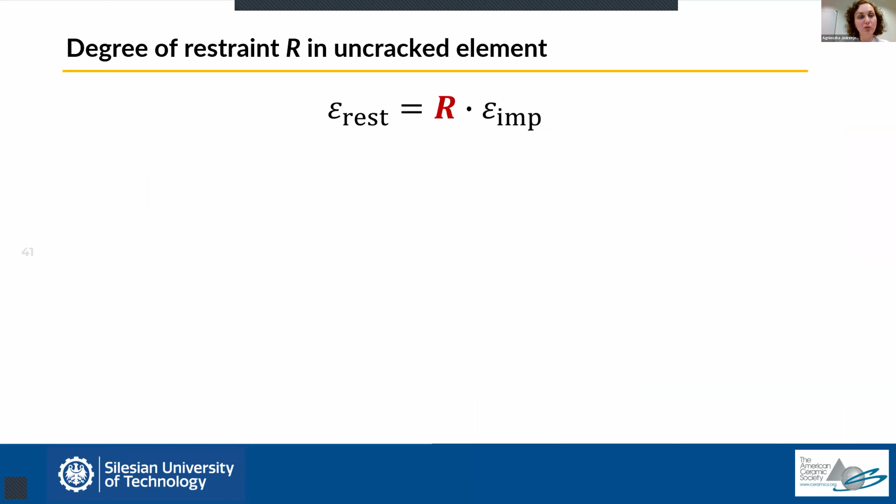And similarly, we have two roads. The first path is with analytical methods, and there are many methods that allow us to assess the value of the degree of restraint, which come from many parts of the world. Some of them are standardized, some are non-standardized.

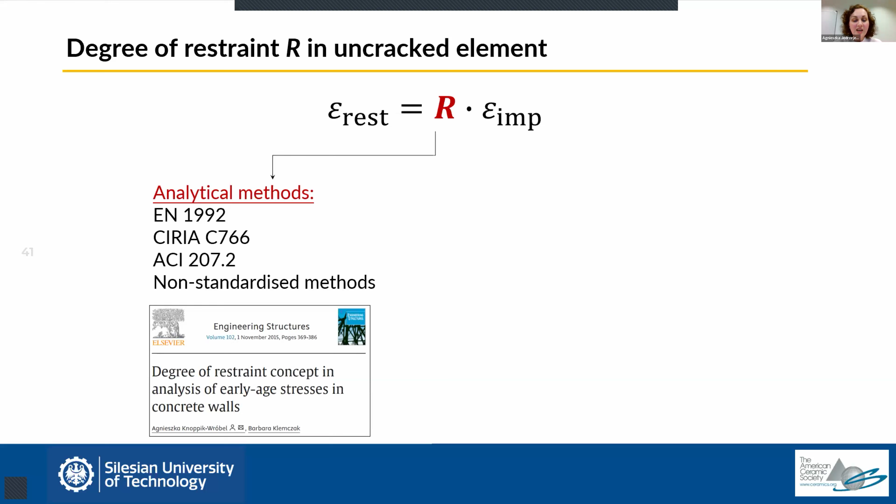But again, to be really precise, especially in complex structures, I support 3D modeling of the structures to get the actual value of the degree of restraint. And also I co-authored some research which goes deeper into this topic.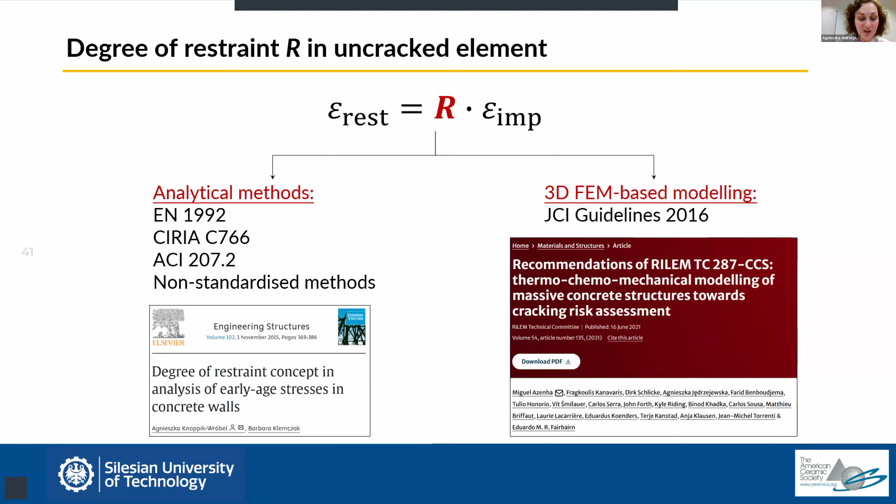And finally, when we talk about the degree of restraint, we need to remember one thing: that all of these methods that I presented here are related to the uncracked element. While actually, when we want to find what is the width of the crack, we are already in the cracked state. And there are some misconceptions regarding the degree of restraint in a cracked element.

So I will not be discussing this equation in detail, but I just wanted to show it to you as a derivation of the model. So again, we come back to this basic model of a tie, which is partially restrained. And if we make subsequent derivations, we get to the formula of a degree of restraint in an element, which is shown at the bottom of this slide.

And we can easily see here that when we look at the stiffness of the element, we see that when the stiffness decreases, and this is what happens in cracking, then the restraint will actually increase.

One common misconception is that due to cracking, the element becomes less stiff, which means it will have smaller stress. On one hand this is true, but there's also a counterbalancing effect of increasing restraint. So we may not be fully confident that the resulting stresses in the cracking element will be lower. They might be the same or even higher.

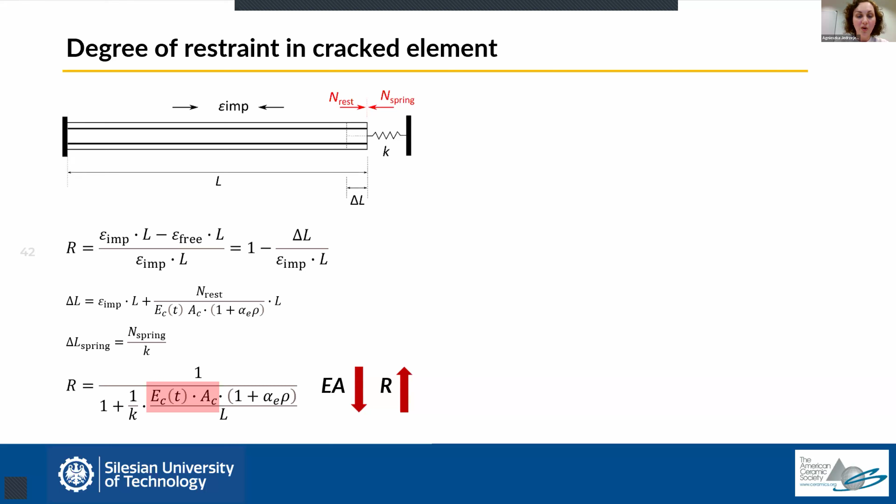Once the crack is formed in the wall, the stresses in the element decrease. This is what we'd expect, which is nice for the wall, but we should remember the stresses will consequently decrease in the foundation, meaning less compression. If there's less compression in the foundation, it will extend and pull the wall, consequently opening the crack.

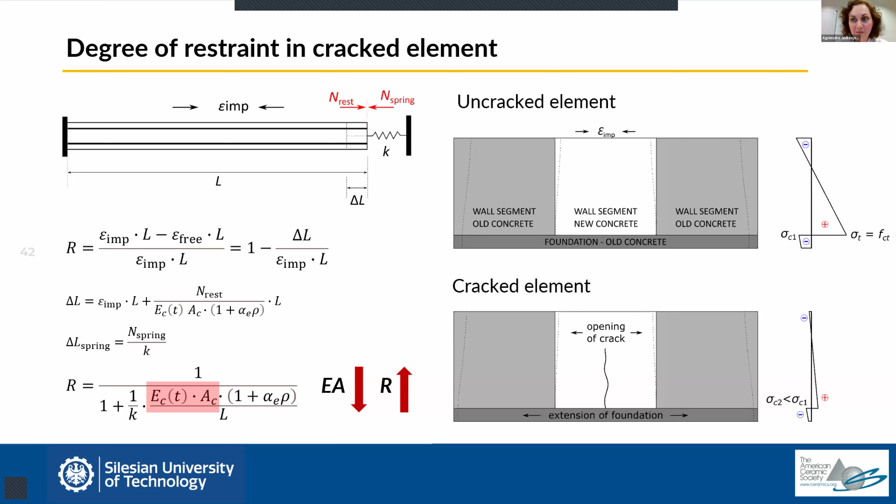So lower stresses in the wall may not necessarily mean the crack will be lower. The final important aspect is that the elements we're discussing are thick elements, of higher massivity. So using the tie model directly might cause a lot of misconceptions. I want to present slides following research started by the University of Graz, including findings by Professor Schlicke and my company.

When we consider a typical tie, or restraint element, we expect such behavior: as the tie is tensioned with increasing force, it causes occurrence of subsequent cracks. Since this element is thin, these cracks will be through-cracks, appearing one after another at the same level of force.

The situation becomes complex when the element is thick and the reinforcement is located close to the surface, not really affecting the core. In such an element, much higher force is needed to produce a crack because the area is higher. But the behavior during cracking is different, because since such large force is required to cause subsequent cracks, it's very hard to produce another through-crack.

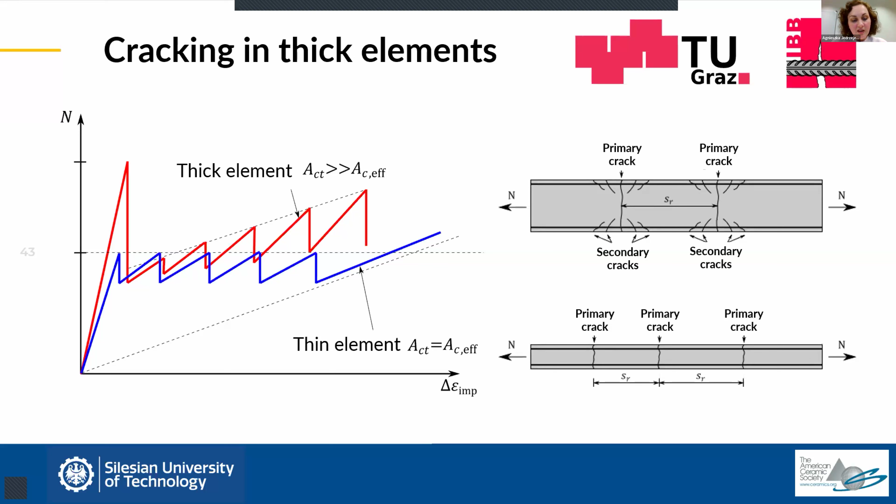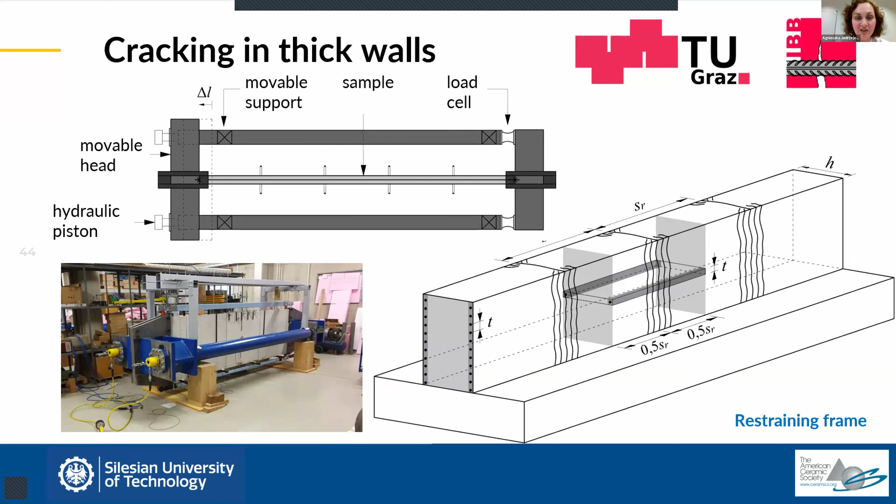We investigated this using an original setup built by Professor Schlicke's team, called a restraining frame. In this frame, we tested a sample extracted from a wall, representing a slice at the height of one level of reinforcement, with the actual thickness of the element. Here you can see a sample representing a slice of a 1 meter thick wall.

The aim of this research is to investigate the development of cracks, and we did observe the cracking pattern I explained. But another interesting observation was that the height of the effective tensile area did not comply with what is assumed in Eurocode and many other standards around the world.

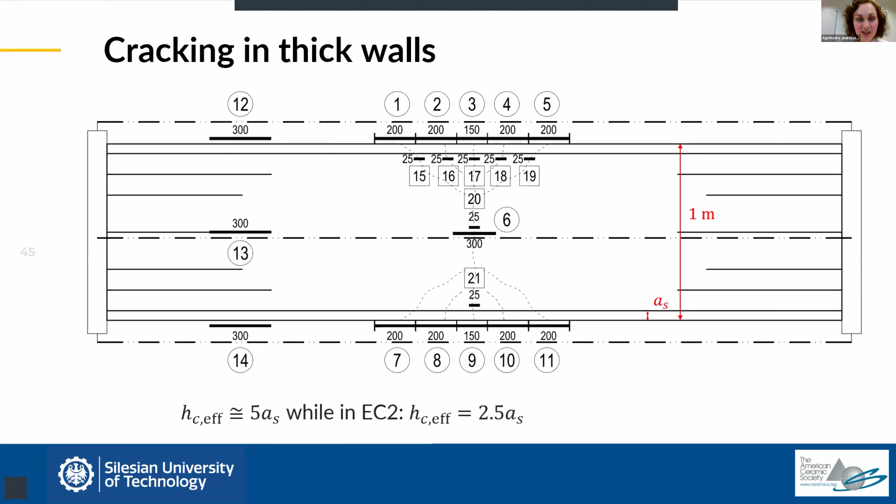Currently, the state of the art says the height of the effective tensile area in a tensioned element equals roughly 2.5 times AS, where AS is the distance from the center of gravity of reinforcement to the free surface. What was observed in this research is that this height actually depends on the thickness of the element - as thickness increases, this height also increases. That's why this effective height should be expressed as a function of the relative location of reinforcement.

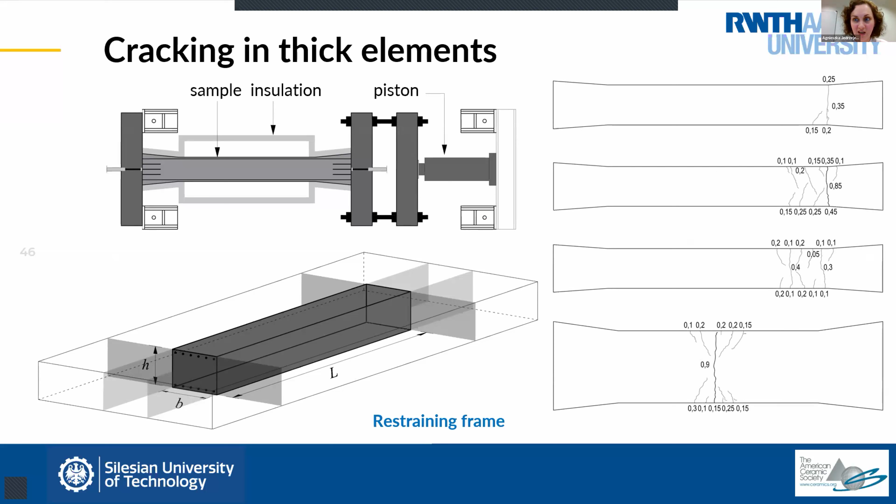Finally, similar research was done in Germany at Aachen University. I studied this research in detail, in which portions of massive elements were investigated to see how the cracking process looks in elements of significant massivity, showing how they behave differently from typical thin elements to which we can apply a tie model. The following was observed in this research.

First of all, this research confirmed this cracking pattern. With increasing thickness, it is harder to produce another through crack, but the primary cracks are accompanied by secondary cracks, and these secondary cracks have very important meaning.

In a sense, they are compensating the width of the crack. What does it mean? It means that if we look at the width of only the primary crack, it is relatively small. But if we add together the width of all the cracks that form this set, a primary crack and the secondary cracks, we can see that the total width of this system of cracks equals the width of the crack in the core.

So what does it mean practically? It means that when we have a real structure, we usually check the width of the crack on the surface, because that's the only thing we can actually do. In such a situation, we would be relieved to see that the widths of the crack on the surface are very small. But what we are usually not aware of is that the width of the crack inside the element might be really big, reaching even the magnitude of 1 millimeter, which is highly detrimental from the durability point of view.

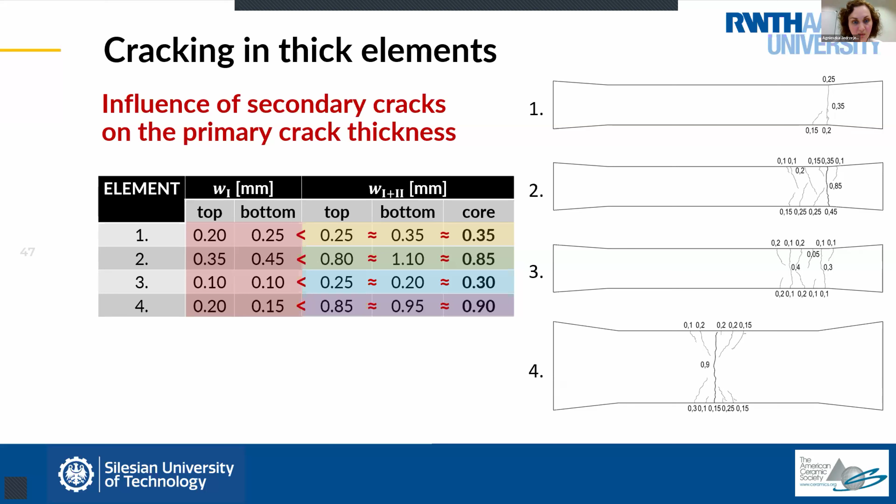And the final observation made over this research is that cracking is, let's say, a statistical process, and that cracking in an otherwise uniform element will happen in the weakest cross section. So I would call it the weakest link theory.

It means that when we have a tie, which we would normally say is uniformly loaded, since concrete is not a homogeneous material but a highly heterogeneous one, we expect the crack to happen in the weakest section, which might result from many things, like location of aggregate or poor workmanship, which results in this heterogeneity.

Anyway, where I'm heading is that in design, we should not focus on mean tensile strength, but rather on the characteristic or lower bound concrete strength, because these calculations show that to predict the cracking force, the force that causes cracking, we should take this characteristic value, the lower value, because the crack will always appear in the weakest part.

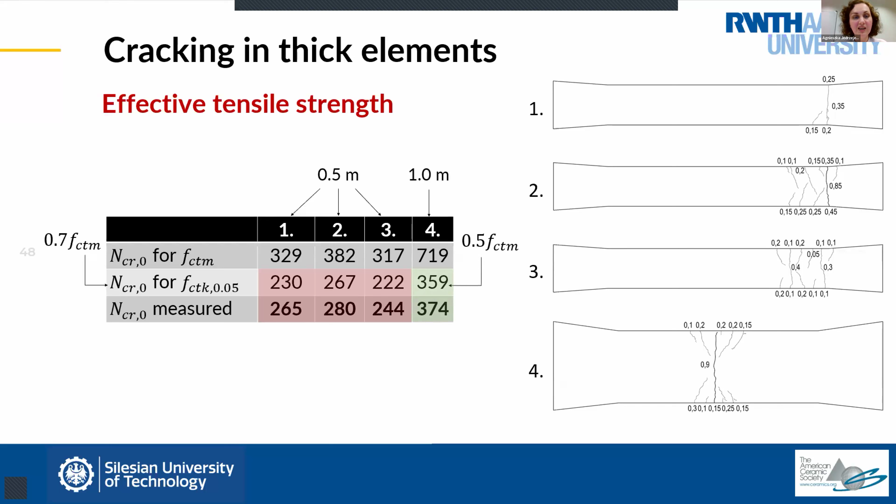Moreover, especially focusing on massive concrete structures, we see an important size effect. So when we consider an element of 1 meter thickness, this value of the effective tensile strength, the tensile strength reaching which produces cracking, will decrease even further.

So to summarize this lecture, what are the key takeaways regarding design of massive concrete structures subjected to restrained cracking? First of all, we must remember that the models we use for design are adaptations. They are based on models used for thin elements subjected to direct loading. The aspects which must be thoroughly considered in such models are as follows.

First of all, we must take into account the actual cracking stage which we observe. In contrast to elements under direct loading, here we will never obtain a stabilized cracking stage, which has a basic effect on the slip length, taken directly in calculations of crack width.

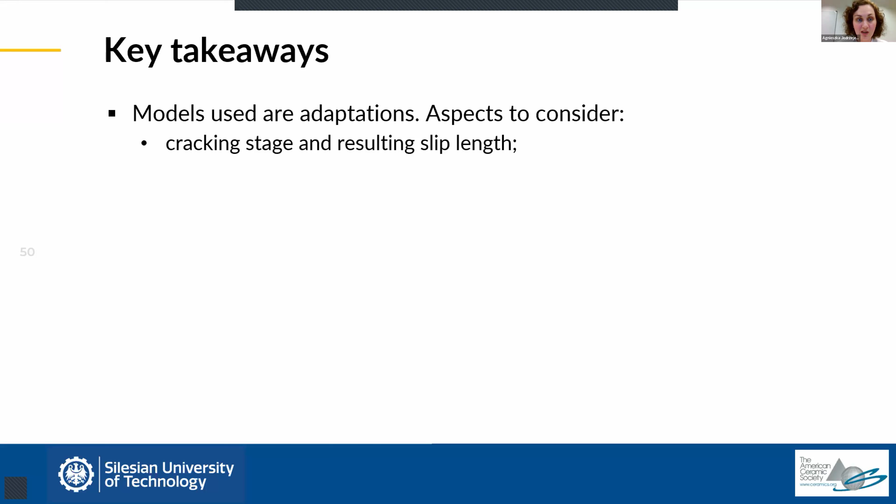Then, of course, we need to remember that in such elements we don't have full restraint, only partial restraint. It means that cracking will have only local impact on internal forces. As a result, the crack width will not only depend on the applied reinforcement, but on the magnitude of load.

So we must be able to accurately calculate the value of this load. We must also remember that this type of load, in contrast to service load, is a sustained load, which has an important effect on creep. That's why we should take into our calculations consideration of the effect of creep and how it influences the stresses.

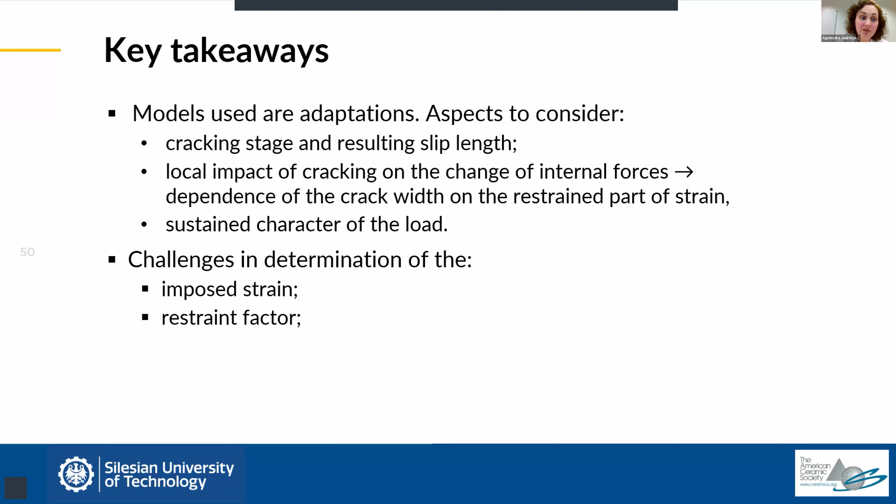Then we must remember that to take all of the above into account, there are some challenges in determination. First of all, the magnitude of imposed strains, especially thermal strains, and the restraint factor. That's why I opt for using FEM-based modeling in determination of the following.

The final very important aspect is that all the models we currently use are calibrated models. This means that the accuracy of using these models in calculation of structures will be as good as these structures have characteristics similar to the database against which the models have been calibrated. My extensive research has shown that if we go for untypical structures, and most externally restrained structures are untypical, the results deviate by far from what we would expect.

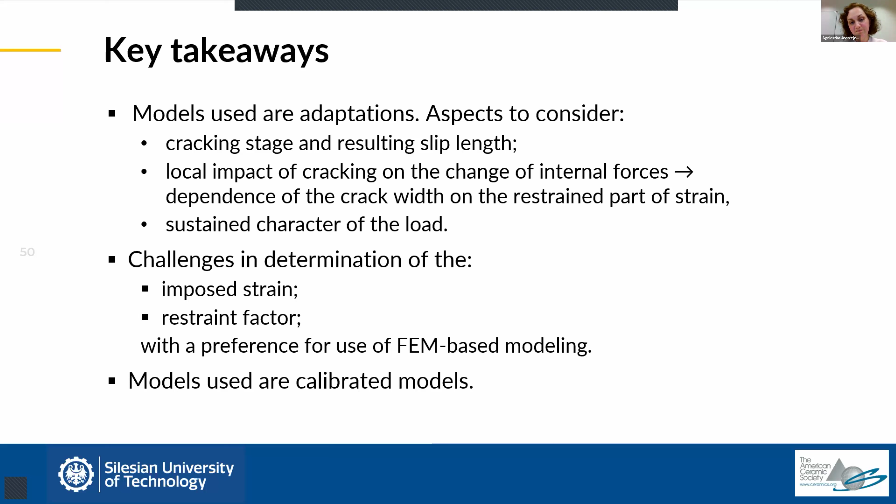Thank you for your participation, and I'm open for questions. Sorry for being a little bit longer than the time I was allocated, but I hope you enjoyed the lecture. Thank you once again.